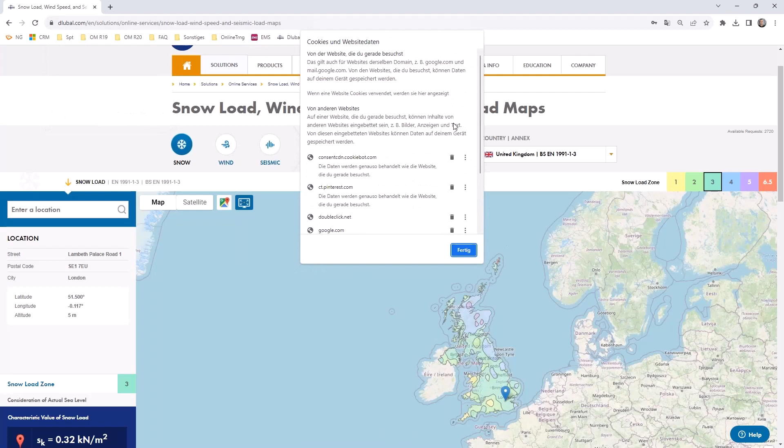So this is of course some data which is saved on the computer to quickly access a page, but it might be necessary to reload it. And then you can select if you want to allow all cookies again. And then the frame should load again for you if it did not do before. So let me quickly sign in so that I will have enough requests for today.

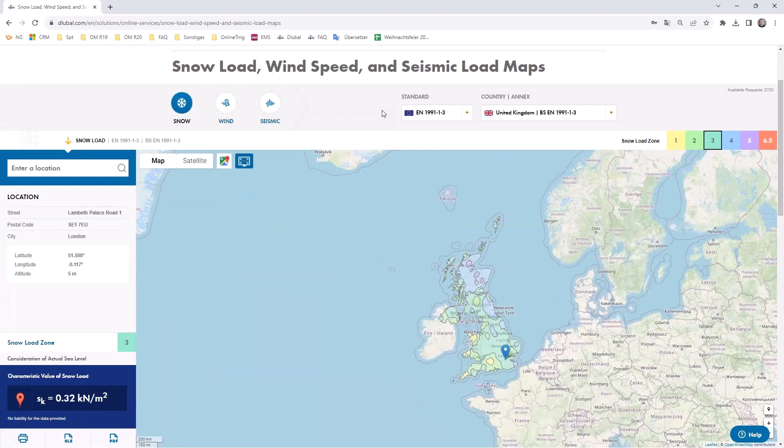And let's go again to the snow load map. So I think you're already coming to it. So it is not available yet for every map. So I do not think that it is available for Great Britain. Oh, it is already. In my tests, it was not available. Okay, so we can use, for example, Great Britain with the Eurocode 1991-1-4.

And then you see the small button on the left bottom of the page, which is of course still announced as being a beta. So please double check the values if they are correct or not. You can of course do that in RFEM, or at least be suspicious if they might be correct. It's still in a beta mode, but we do not want to not present it. So you can think about using them.

So if you once click on the button, you can already see the three diagrams you can now gain. So it's not only about the basic wind speed. No, you directly jump into the map and parameters according to the Eurocode, and it will create the diagram over a certain structure height. So if you would adjust it to over 20 meters in here, you would see that the diagram will of course be adjusted. And you can of course as well jump into the wind profile tab in order to copy paste the values with the level.

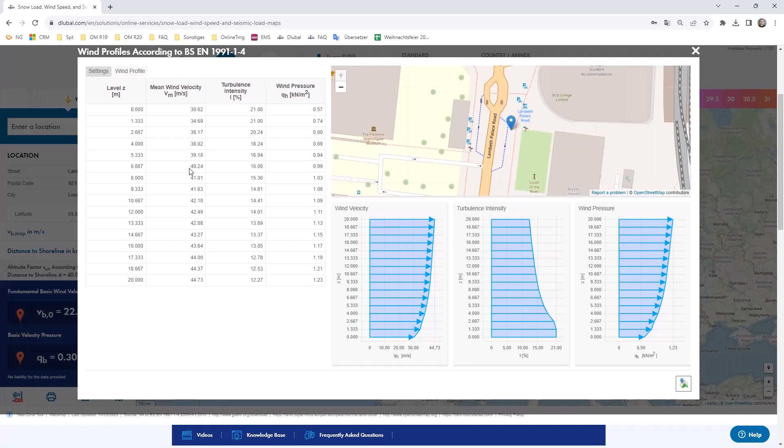What is then of course necessary if you jump into the RWIND main program for the definition of the wind profile and turbulence intensity profile. You can as well also choose that you want to have a user-defined definition and adjust all the values you see in here. You also get a closer look on the place where you are. You can also switch off the map if you rather want only a big display of the diagrams.

So just once to remind you again, it's still in a beta phase, so it might not be available for every standard we provide, but this might be quite useful for you if you use RWIND without RFEM 6, or if you want to compare your hand calculations, or if you want to compare our calculations and tell us something might be wrong or not.

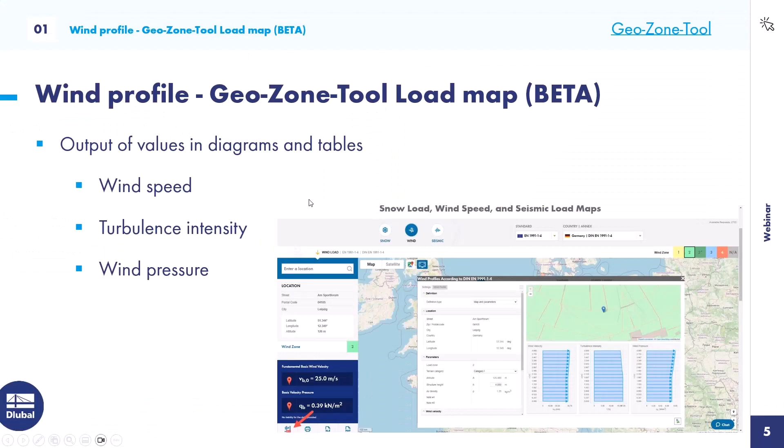So this was something not directly linked to RWIND. So let's now jump into the main part, of course, our program RWIND. And this is my summary of the 4 features I would like to mention. Maybe you are not yet used to it, but you can also find all the data in our extranet. So if you log in with your account and you go into the development tab on this page, you can see features and also bugs. And this is most likely the place where you can inform yourself of what is new or what was fixed.

And if you then restrict it to RWIND, this is in German, depending on the language which is set in your account. You can see that these features were introduced into the 4th version or the 3rd version and so on. And you could also check the bugs which were fixed for the certain files.

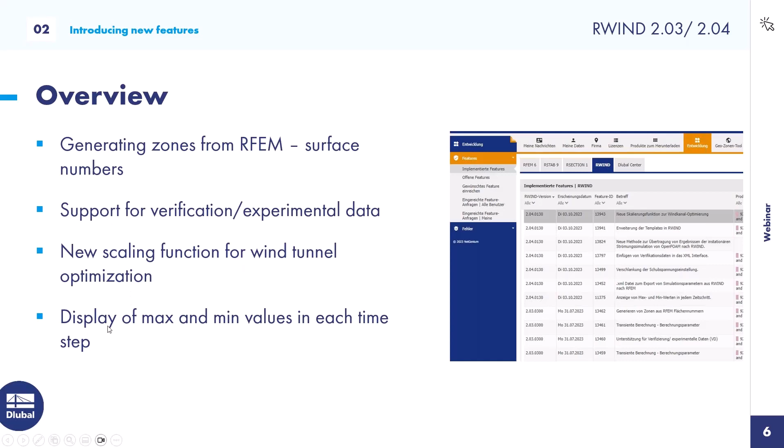So what I would like to talk about now is the first feature, the generation of zones from RFEM surface numbers. The next one will be the support for verification or experimental data. This will be the main part of today's webinar. The next one is a new scaling function for the wind tunnel optimization. And last but not least, we will quickly step into the display of maximum and minimum values in each time step. I have, of course, one slide for each feature, and then we jump into a small file in order to check where you can find it.

So you are now able to generate zones directly from RFEM surface numbers. Of course, only if you use RFEM 6 and then hand over the model to RWIND. We will now also hand over the surface numbering, and then you are able in the edit part of RWIND to generate zones from surface numbers. So each surface, and you can of course split as much as you want in the RFEM main model, will create a zone.

And remaining objects, so you may of course also hand over members, they will also have triangles. They will be assigned to zone 1. So of course that's a bit of a complication that they are assigned to zone 1.

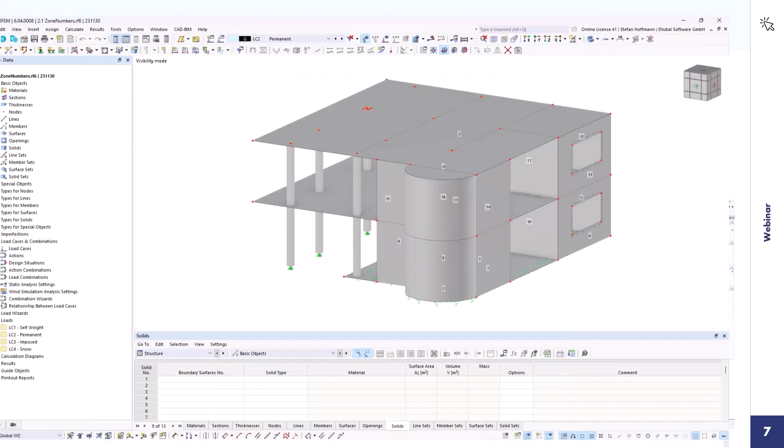But if we now step into my example file, what is also installed, it's the concrete building where I switched on the surface numbers. You can see that we have a surface number 1. And if you do not want that 1 also includes the member triangles, you just have to once go into the table and insert a row. So the surfaces will not start with 1, and all other things should be synchronized in the back.

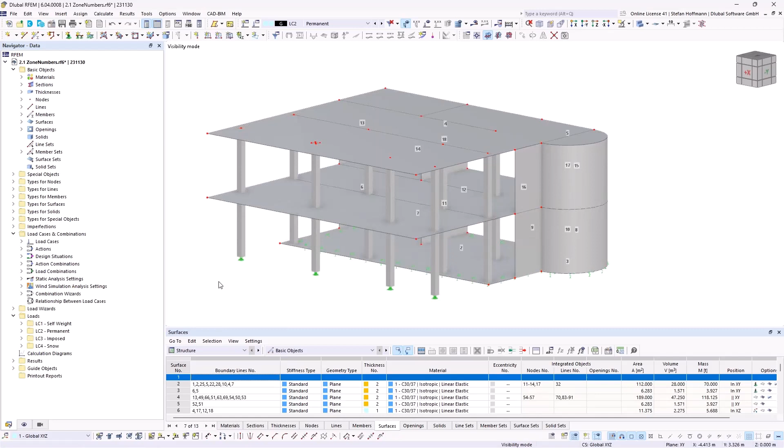And now we have only surface numbers starting by 2, and all other stuff may be handed over to zone 1. If this is not fine enough for your difference, we will also see it in the main example later on. You might also right-click and divide surfaces with intersecting lines in order to create multiple or more zones.

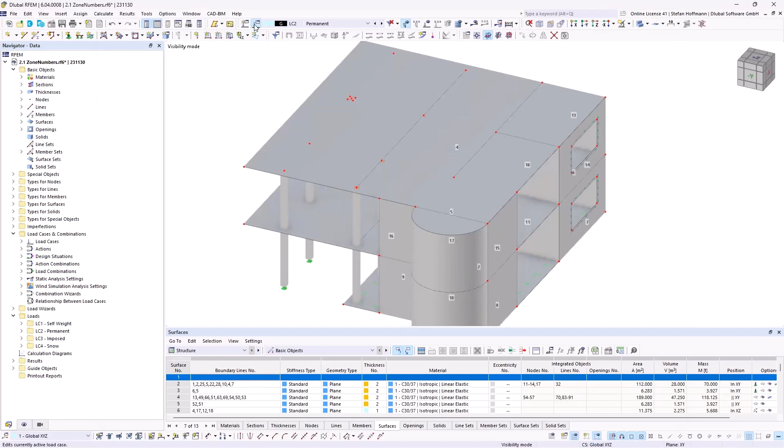So let's quickly create an example wind simulation load case. We will not care about any settings that are necessary to be taken. We will just open our model in RWIND, which can be quickly done by the button I used. So our geometry is handed over, and now there would be only one default zone. So it is possible for you now to hit Edit, Zones, and generate zones from surface numbers.

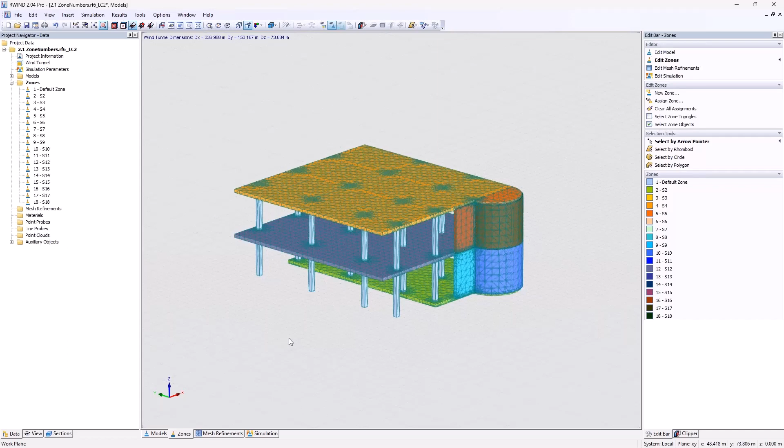So you quickly see that there are now a lot of zones created, and you do not have to do that manually. So you don't have to create a new zone and use the selection tools to gather all the triangles which might be necessary for your file. No, if you already consider the surface numbers or a certain division in RFEM 6, you can directly create these zones in order to quickly evaluate maybe normalized pressure over a certain zone.

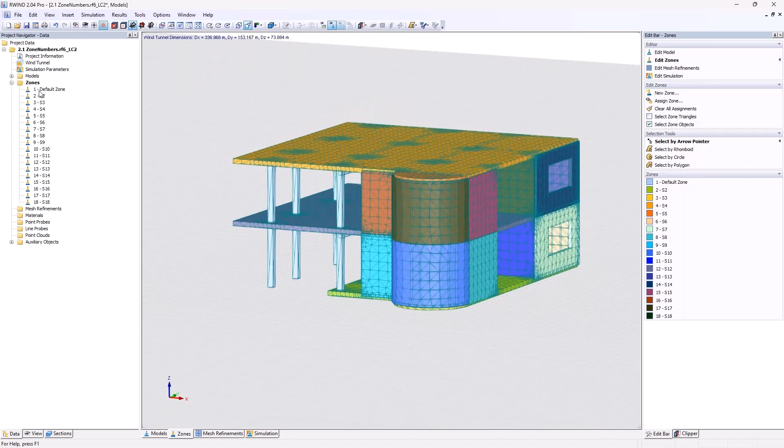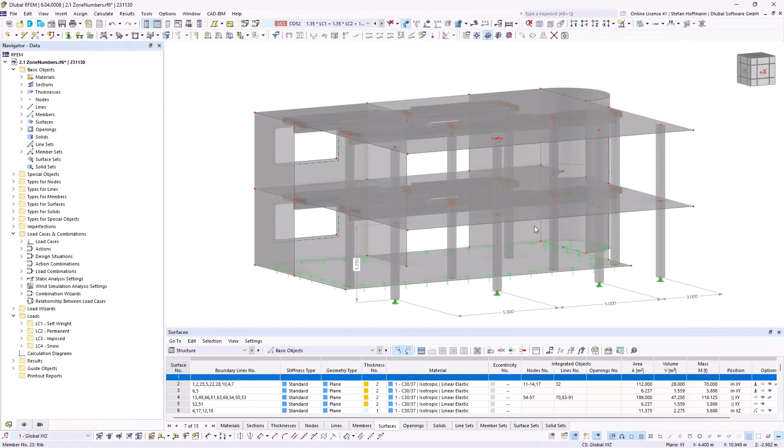I will later on show you how we will use it on our monopitch roof. And as told, you can see that there's of course also the default zone number 1, where you will then be able to find every other stuff which is not related to a surface number. Okay, so this was the first feature I wanted to talk about. We will use it later on in the next example. So let's close everything, go back to my presentation.

So the next one is the support for verification and experimental data. So we now offer you the possibility to enter verification data into the table. This is yet linked to point probes and pressure values that you can enter. And you can then display the data in graphs using labels, so the normal point probe labels. But you can also do a graphical representation of the differences between the verification data and the simulation results. You can switch that in the result navigator.

You can also choose the extrapolation of the data on the surfaces in RWIND using 2 methods, which are yet introduced. They are explained in the manual. And you can also restrict the verification data to be extrapolated to a certain zone. And we will later on use that, of course, in my main model.

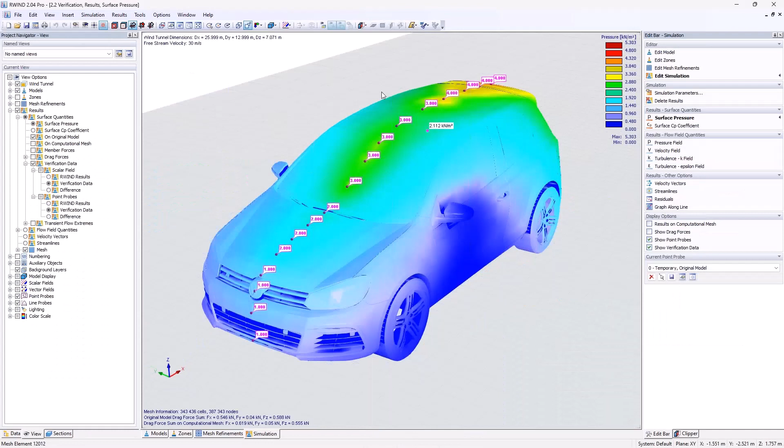But in order to introduce the verification data first, I use the Volkswagen Golf, which is an example installed already if you install RWIND. And then I have already defined a point probe. I activated the option for the point probe. It might be, of course, a bunch of probes you want to enter if you want to define certain values for zones.

We now only did 1 point probe, and if you activate the verification data, you will get one more table over here where I have entered random values. So they do not come from any tests. I just wanted to show you the labels so that you can quickly estimate where they are and what they are doing. So then you will also be able to adjust the verification data options.

So you can choose the interpolation method, which is yet fixed to all point probes. So you cannot yet differ between Gaussian interpolation or diffusion, but you may set a different data range constraint for certain zones. We will see that later on in the other example. So if you do not know about Gaussian interpolation or diffusion, you can just hit F1 on the keyboard. And usually it should be linked, but maybe we did not yet do this.

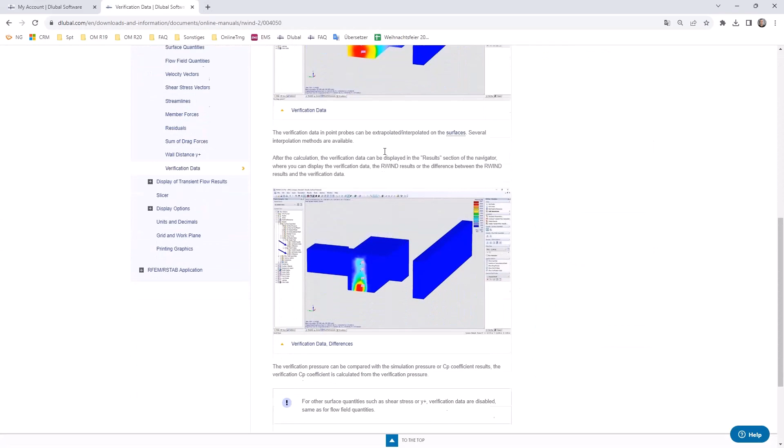So you can quickly, of course, search for verification, wait some seconds, do not wonder if you do not need to hit enter, and then choose the topic, which may be about verification data. So there is some general part of it.

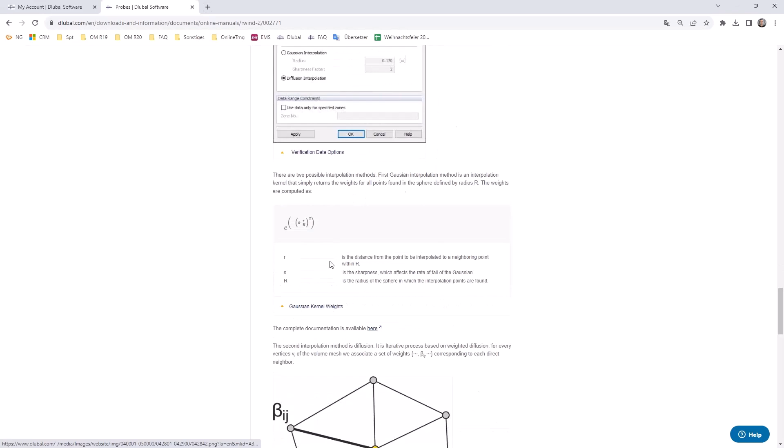And if you go into the probes, we quickly search it, then you can see the explanation about both interpolation methods. So just scroll down and then you will find the information about the second interpolation method, or I think also about the other ones. Yeah, so we will not dive into the theory behind it now. You can double check it if you are interested later on.

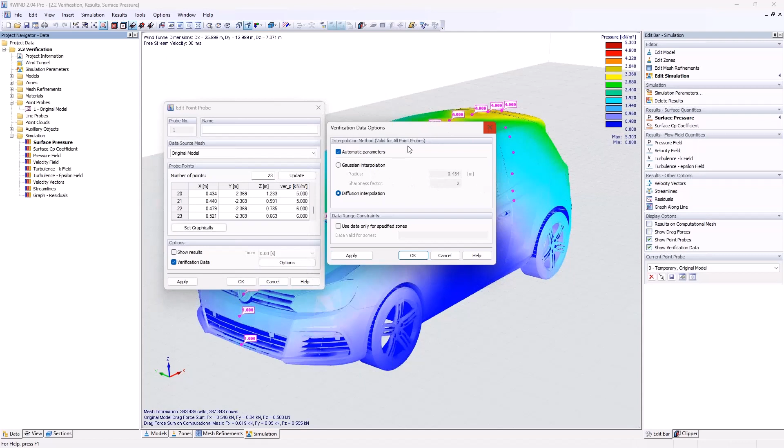What I do remember by myself is that this will most likely diffuse interpolate about a whole area in slides. And with the Gaussian, you can set a radius which will interpolate, but we will once again, of course, later on show that.

And if you have these results, you can always differ between the verification data of the scalar fields and the point probes. So you can step on over and show the results you get from the numerical wind tunnel analysis. And then you can, of course, also switch to the verification data. And I think the biggest influence will be the difference. So you can directly check according to the colors how far our calculation is maybe away from the standard, which does not really mean that it must be far away from the reality.

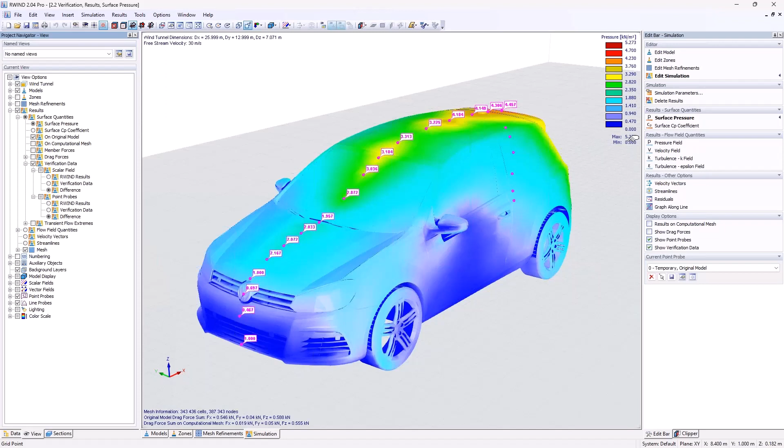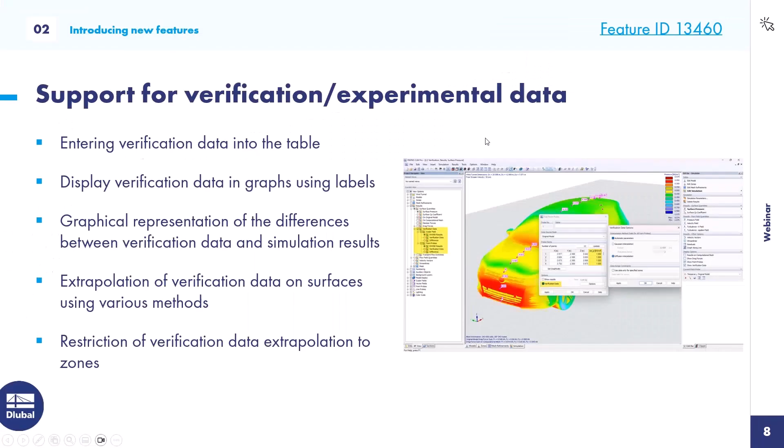So there's, of course, always the question, how can we verify our model? So from my proposal, every FEA analysis or also CFD analysis needs to be, of course, verified by a wind tunnel experiment. And then you can enter the data and check if the assumptions you make in this complex CFD analysis match the reality. All right, so we will later on use that feature, of course, once again.

So the next part is the new scaling function for the wind tunnel optimization. So you are now able to define scaling factors to automatically adjust the dimensions of the tunnel, and you will be able to save the user-defined scaling factors. So let's quickly jump into the example, which is once again the Volkswagen Golf car. And then you usually double click on the wind tunnel. So let's zoom out a bit maybe, and see these automatically adjusted values.

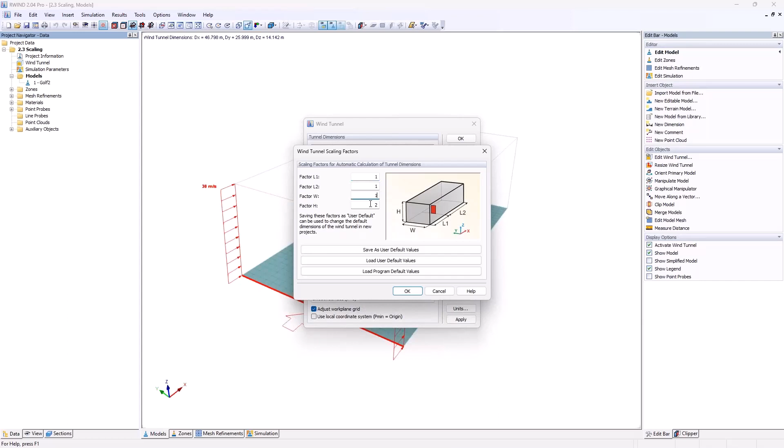And then there is a button of the scaling factors where you can now define your own values. Usually it is like this. So it is multiplied then with the normal values you have in the program. So this is the wind tunnel the program will offer you. But we propose most likely, if it's going into a more detailed calculation, a recommended wind tunnel size.

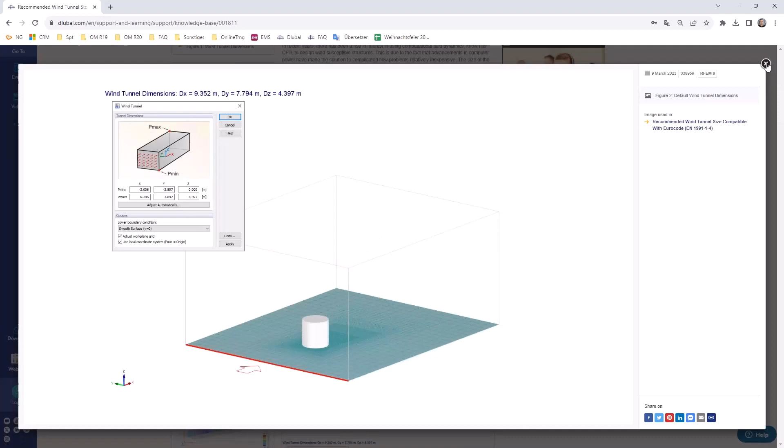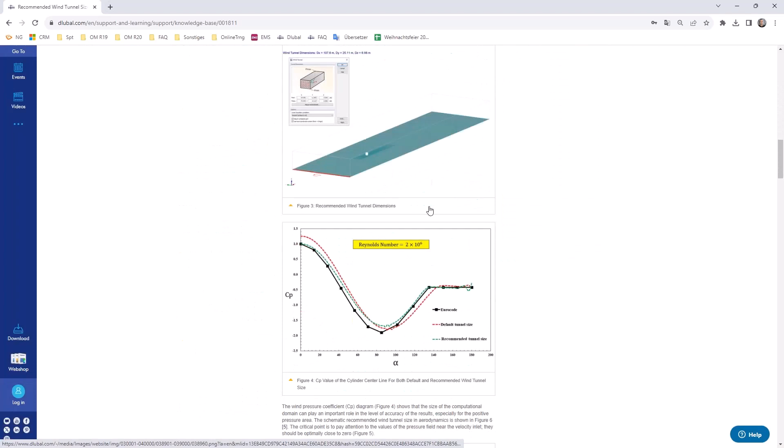I did already once mention this technical article by Mr. Katsemian in a different webinar, but I would like to once again put some effort into it, that it is quite necessary to think about the dimensions. So if you compare the standard dimensions to have a quick estimate of the wind load pressure and the size we would recommend, which is of course then extending the calculation time a lot, if you want to compare values to the Eurocode, you can see that the size will be much bigger. And I did, of course, a quick estimation of what the values should then look like.

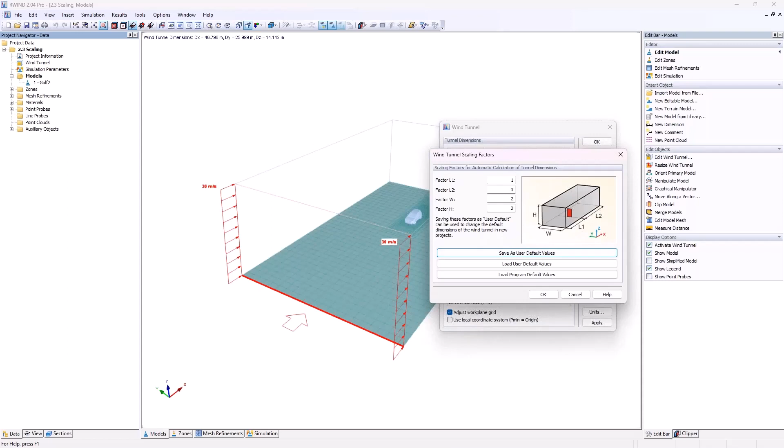So if you would like to match the technical article, I do not like numbers with comma, so it would be 2.7 in this length, 1.6 in this direction, and 1.85 in this direction. I would use 1, 3, 2, and 2, hit OK.

Then you will be informed that these are just the factors used, and you have to use, of course, the adjust automatically button once. If you then hit OK, you can see, well, it did not change a lot because I think it was already bigger in front. But then your wind tunnel will be adjusted according to the factors you enter in here.

So if you put 10 inside it, say OK, and adjust it, then you can see that this factor is going to be increased a lot. And then this will offer you the possibility to not think a lot about meter values, but to quickly enter the factors you would like to use, save them, load them, and apply them on your model.

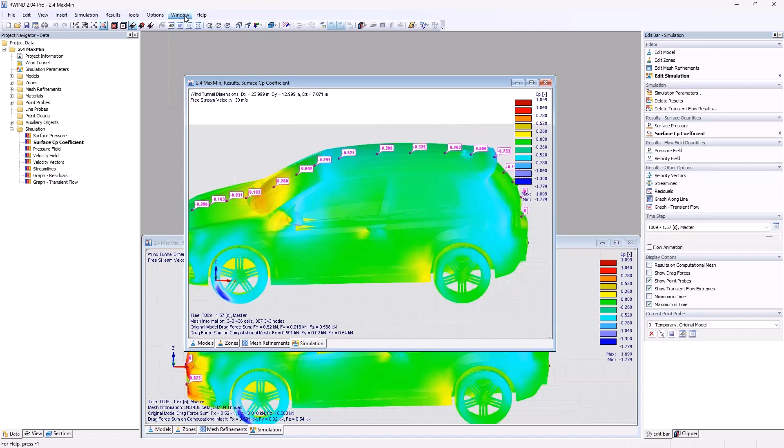So the last feature I would like to present today is the display of the maximum and minimum values in each time step. So this means it is for the transient calculation, limited to our RWIND 2 Pro version. And it will offer you to have some kind of envelope for surface pressure or Cp coefficient values. So let's jump once again to the golf car. There's also a transient calculation file for the golf car.

So what it is about now is that usually if you do not show the transient flow results, you will have a slider over the time where we can see, most likely on the back part of the car, that the pressure will of course change over time due to the wind acting, of course, turbulent. And then it would be kind of hard to evaluate where will be the maximum suction or the maximum pressure.

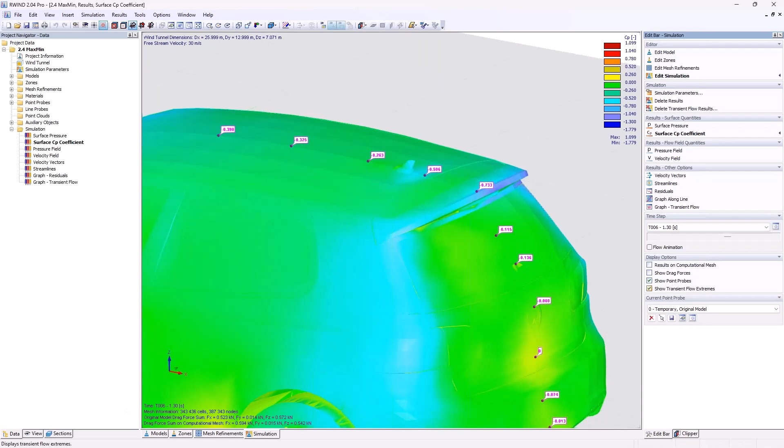Or if you are lazy and you don't want to check that, you will now be offered to show the transient flow extremes. And if we, of course, use 2 monitors, we can once show the minimum in time, which might be minus 0.814. So it's of course the minimum with a minus. And we can then also choose to show the maximum in time. So this same point probe would be, in a transient calculation over time, gaining the values of minus 0.733 or minus 0.814.

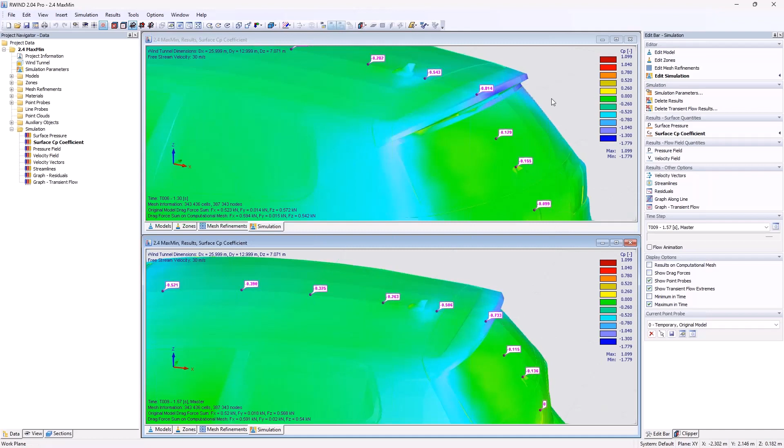So this is one way to determine the maximum or minimum values for your structure or your file. You can, of course, also switch that value in the view navigator, but I think the quickest way is, of course, to do it on the right. Okay, so this was kind of a slide presentation, but was also stepping into the program.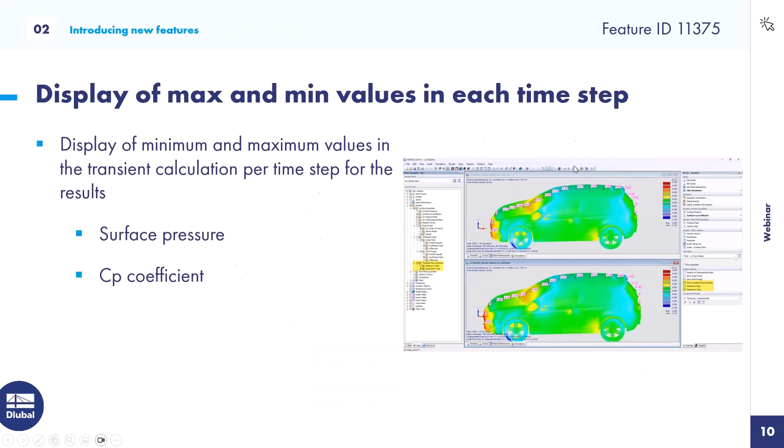And now I would like, of course, to show you how we can use the feature of the verification data on an example. So it's a building, it's 10 meters long, 8 meters wide, 4 meters high, and it has an angle of the roof of about 5 degrees. So it's a monopitch roof, and we will apply the zones for monopitch roof. If the wind is going into the main X direction, there will be 3 zones. So the F zone, G zone, and H zone according to the Eurocode. And it will be divided into these parts.

So we will use, of course, the generate zone function in our model. And we should get these zone dimensions. So I have stolen them from the wind load assistant because this is a known example type of roof for the Eurocode. And it is supposed to have these pressures on the certain zones. So we will start with a fresh model in RFEM 6. So let's give it a name. So it's the name of today, and it's called monopitch.

And what we of course need to activate: we will not do any design of elements. So it's just really about giving our model into the wind simulation analysis and gaining the pressures of it. So I will only activate wind simulation. I could activate all because I'm working for Dlubal, so I'm not limited to any add-on, thanks to that. And we will do it according to the German national annex, because we are quite used to do so, and we also tend to present our English webinar for the German annex.

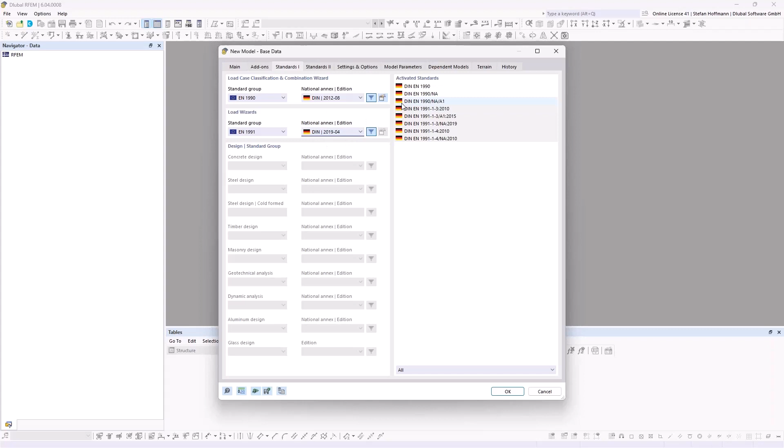What you can now as well do is choose already a location in the GeoZone tool if you want to. We will do that later on. And you could as well also define a terrain. Just remember, it is possible, but since we would not like to have any influence by neighborhood or by the terrain, we just skip that. So once the file is loaded with all the data used before, remember that the first angle of wind simulation load is going into the global X direction.

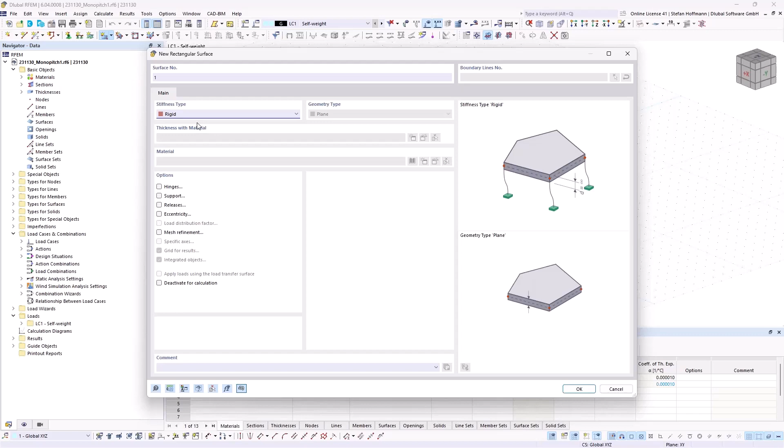So I tend to rotate my model because I dislike to rotate the wind load. And I will now start by modeling the bottom plate. So I will simply use the rigid type, because I'm only interested in my wind load on the structure. I'm not interested in any design yet for the building. So it does not matter if it's concrete or metal. We can just use rigid because I do not account for any stiffness.

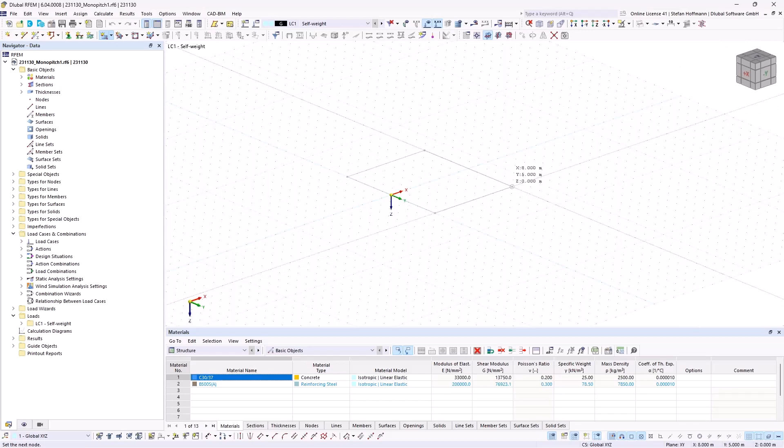So now I told that it is 10 meters times 8 meters. So we would now, of course, need to define this size in our program. So where did I choose it? So I'm starting at minus 5, and we're going to 5 and 8. So this will be the bottom plate.

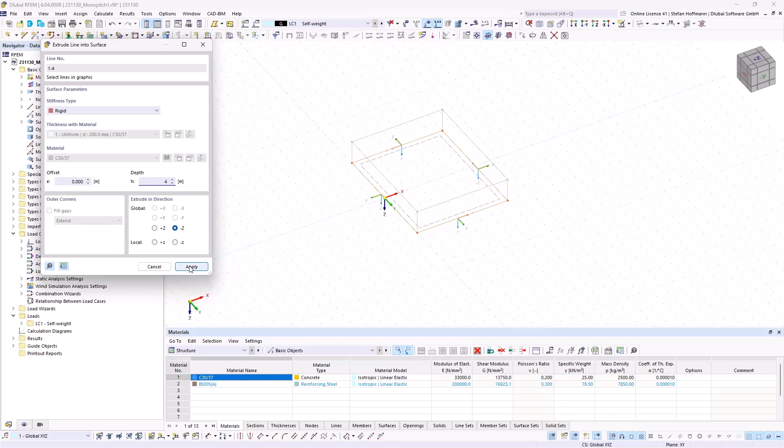Then we can simply, with the control key on the keyboard, mark all the lines, hit a right click on them and extrude them into surfaces. This will offer you the possibility to quickly model a surface. We will once again use the rigid type, and the height should be 4 meters into minus z. Okay, we apply that. So we most likely have already our hull.

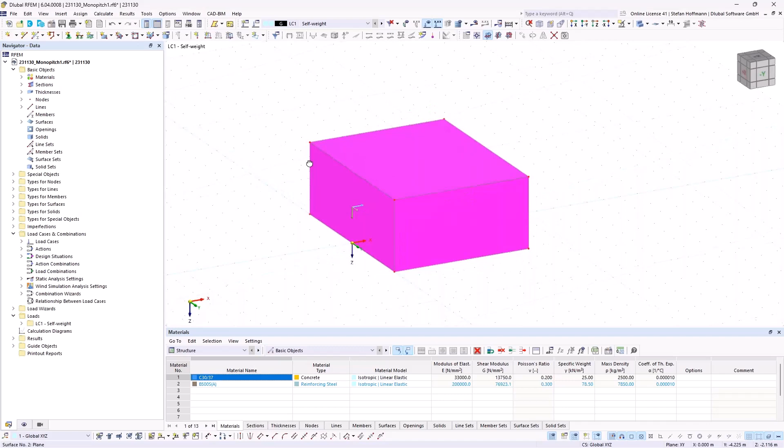You can of course switch into this display if you like it even more. And then I would just mark my bottom surface and copy paste it with the control keyboard and snap it to the top. We of course need some boundary conditions at least. So I would just apply some line supports, being some singular foundation on the length. And then it's of course about to define the angle.

You can quickly do that by simply hitting the surface and use the manipulation tool to chamfer it. So you can now decide that you want to chamfer it, for example, 5 degrees. Due to our wind load assistant, I use a 5.01. And then we need, of course, to think about what will be the direction. So it is about our y-axis. So this is the turning point, and it should be into the z direction. So we want to have it into the global z direction.

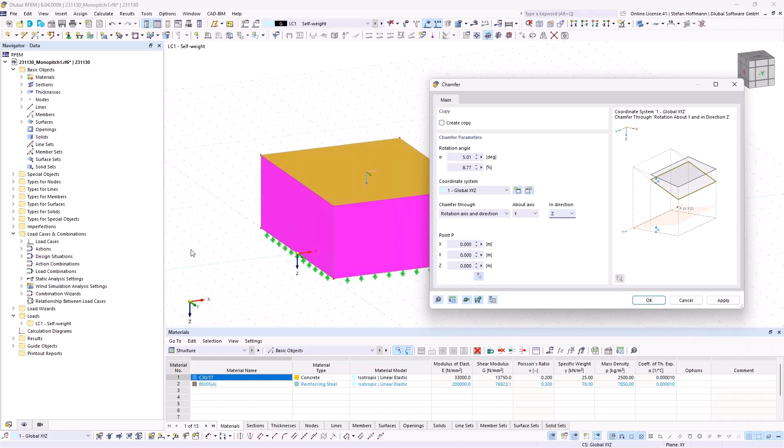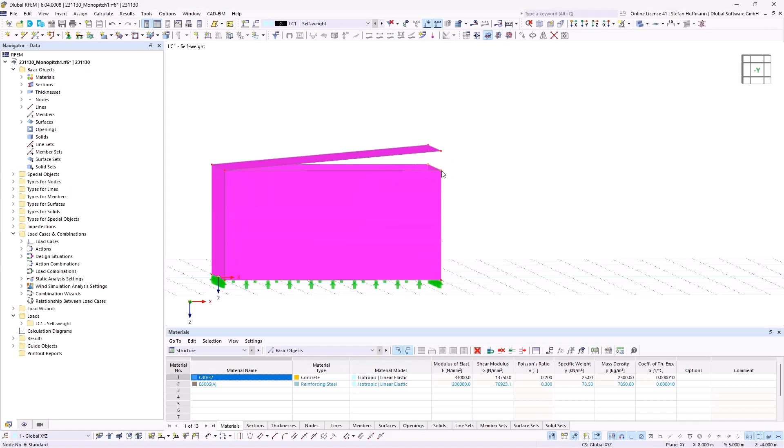Since we use this point already, you don't need to choose it, but we can of course once choose a node in here. And if we hit OK, it is moved. Since I only selected the surface, all other combined elements are not moved. So we could simply before mark everything, or we now just mark both nodes and drag and drop them to this position. And then you can see that the surfaces are quickly adjusted. So it's quite smart. If you would like to model, it's close to a CAD design, I think, that you can use, of course, drag and drop and so on.

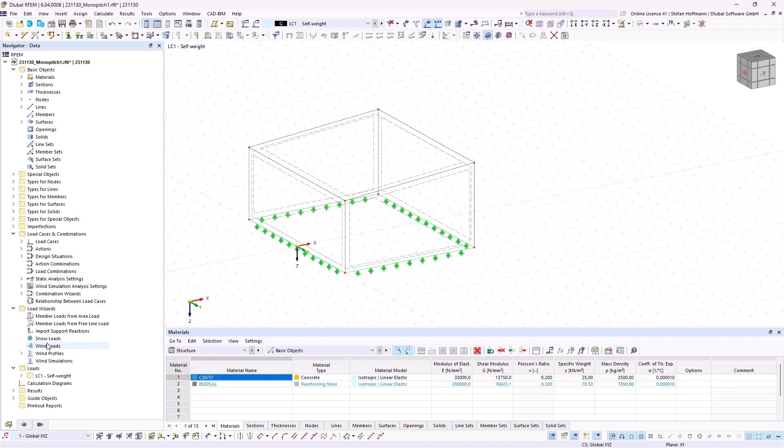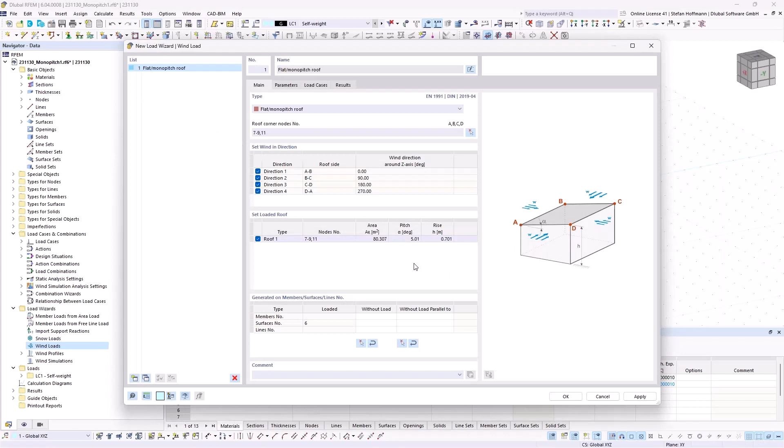So the next thing we would like to do is, of course, to check the wind load areas. We can do that with the wind load wizard. This is not RWIND. This would be the standard approach. And we are now only interested in the mono pitch roof. And then you see the picture, what 4 corner nodes you need to choose. So we simply pick our 4 corner nodes and hit OK. And then we introduce the parameters.

So now I hit the button to jump into the GeoZone tool, and I will use the location of Leipzig. It does not matter where we are. You can see that the German standard will choose the wind zone 2. I will load all the data. It will gather all information from the GeoZone tool, so you do not need to enter them manually. And then I can adjust the structure height, which is roughly 4.7 meters, and we will use the terrain category 2. If we do that and create all the wind load cases, we can quickly estimate the results already.

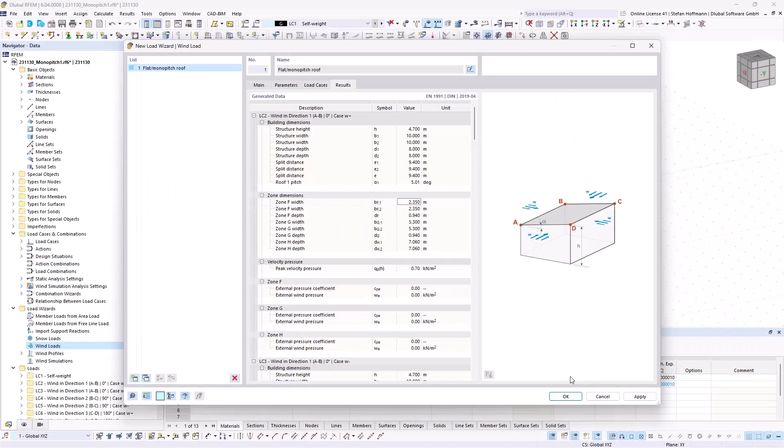So you see the load directions and you see that our zones will be split. So if we jump quickly back into this part, we will be given all the data, what the standard will give us. So the width of the zone F, so e divided by 4 is 2.35 meters, and e divided by 10 is 94 centimeters. So you will be given this information. This is why we do it as well shortly with the load assistant. And if you display it, you can see that this is the load or the suction we are going to experience in our wind, and we will then check it.

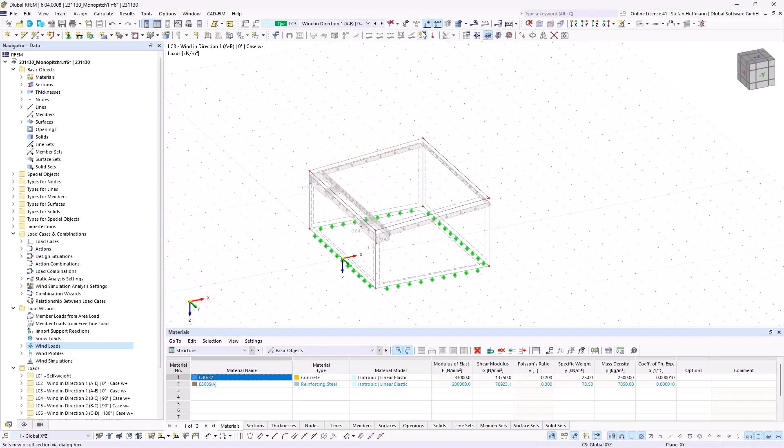So let's continue. So what we now want to do is that we already define now zones. So we would like to split the roof into parts. For that, we would like to have our lines showing into the same direction. So now we can use both lines, hit the right mouse button and divide the line via distance. So now we could just simply enter 94 centimeters, but it is meant as a projection showing from top.

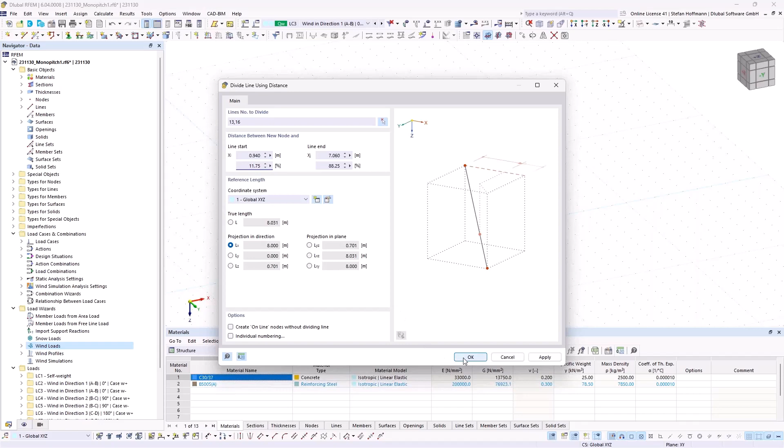So you are now able, of course, also to use the projection of the line into the local X direction. You can enter 94 centimeters in here. And if you do that and hit OK, you can quickly divide the line using it for further modeling. We will now simply draw a line into here and have now the line which is going through, and then I told that the distance will be 2.35 meters.

So we will use this line and also divide it with a distance. It's not about the projection or anything since it is the same if we use it, and split the line at 2.35 meters. We will also divide the line at the distance at the end, 2.35 meters. Okay, so once we have it, we can mark this node and copy it from this point to this point in order to have it.

Or you can, of course, also try to hit the tool in order to snap the perpendicular part. I'm not sure if I activated it. So I just simply use, for example, also this line and copy paste it over here.

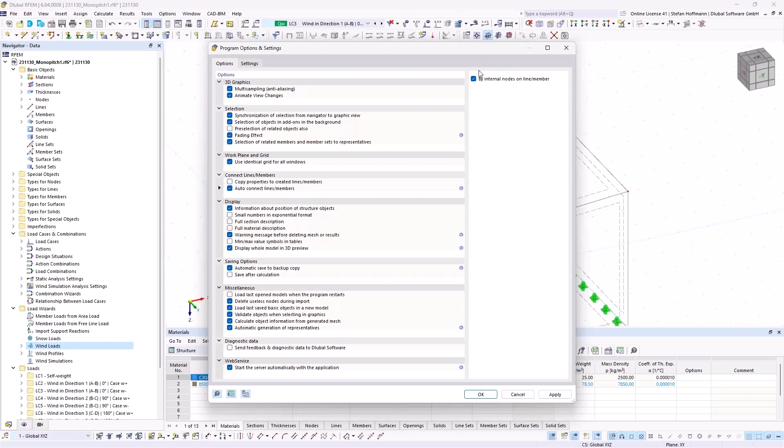If you are curious why maybe there are red nodes or blue nodes created, so if the line divides or not, you can step into the program options and choose the setting for what it is supposed to connect, members or lines. If you do not manage to do so, you can simply later on use this function, go over and check if the lines will be divided.

So the last part we would need to do in order to have certain surfaces is to right-click on the roof and divide the surface with intersecting lines. And voila, we have now 4 surfaces for the top, which will be giving our 4 zones as expected, and what we would like to do so in order to compare it with our experimental data.

So this is one possible way. If you have a quicker one, of course, you can also use your own way of modeling.

Next part we would need to do is for the wind analysis, to step into the mesh settings in order to check what wind simulation options we would like to use. So you can think about the level of detail or the simplification of the model. You can think about only visible objects that they should be handed over.

Since we do not have members, we can just deactivate this option. We will also not hand over any terrain. We will also not hand over any surrounding models. Let me shortly drink something.

And we will also not keep the wind simulation results. Since we use rigid surfaces, we do not need to think about surface thickness. Run Rwind in silent mode is mainly supposed if you have a lot of load cases and you do not want to double check them and manually start the calculation in Rwind.

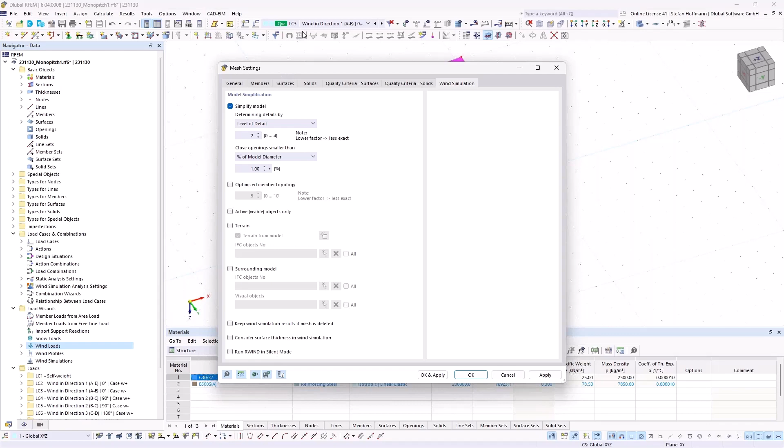You can disable this button, and once you calculate a wind load case, Rwind will open and you will be given the option to adjust everything you would like to do. So if you want to double check the model, you can then start the wind calculation by your own.

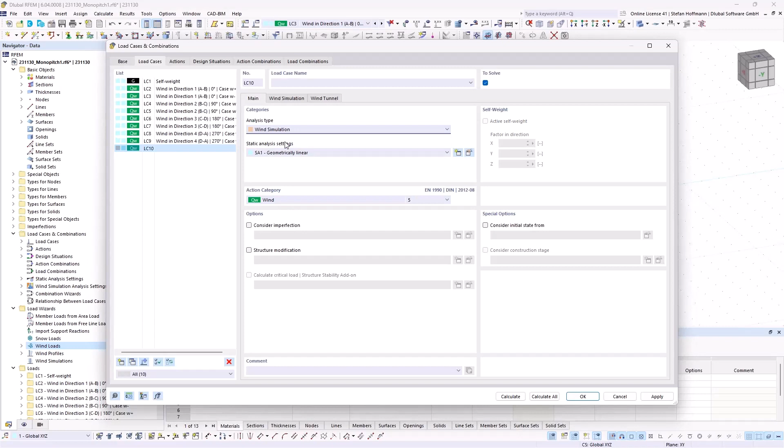The next part is that we need a new load case, of course. So it will be the action category wind. It has to be the analysis type wind simulation. And then two registers will open on the top. There you can choose for the wind simulation, of course, further settings.

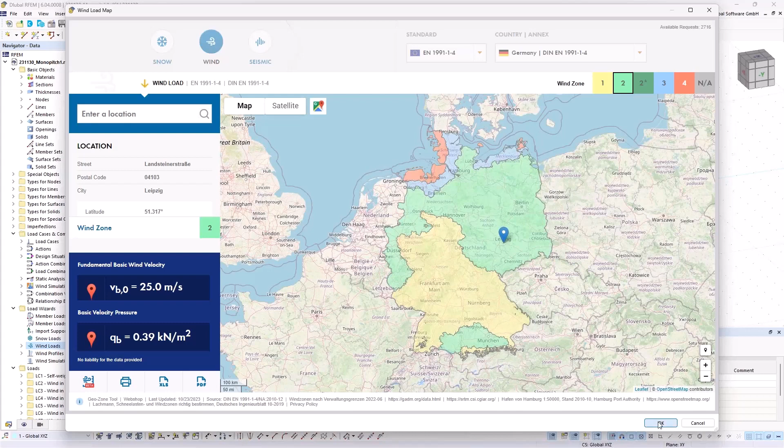So the first one would be the wind profile. If we step into it, you can see that this is, of course, once related again to a certain destination. So we once again check Leipzig in order to load the data inside it. You can also manually define it if you want to.

We would just change to the category 2. The height is taken automatically by the program. We will not adjust any other factor inside this. And there you can already see the profile, which should match with the ones I showed in the beta phase. But due to the beta phase, there might be still some adjustments.

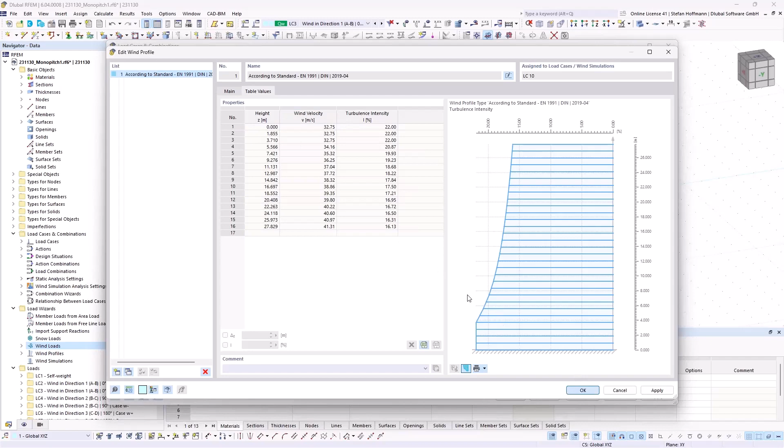Using this button, you can switch between the turbulence and the wind profile, or you could also be able to see the wind velocity given in the tables. If we defined it, the last part would be to double check the wind simulation analysis settings.

So if you would like to do a basic steady flow calculation or a pro transient flow calculation, this is always up to the structure and turbulence you are expecting. We will simply do a steady flow calculation. We will use the presets given over here.

And if it is up to some certain controlling of standards, we would propose to also activate the boundary layers. But for this, please check out our technical articles, because Mr.

Katsemian did provide a lot of verification examples and also a lot of nice to know facts for maybe beginners in a CFD analysis, because we offer a tool with a quick estimation of results. There are still technical parts behind it you may be curious to know about. There are other things you could adjust, but we will just leave it as is.

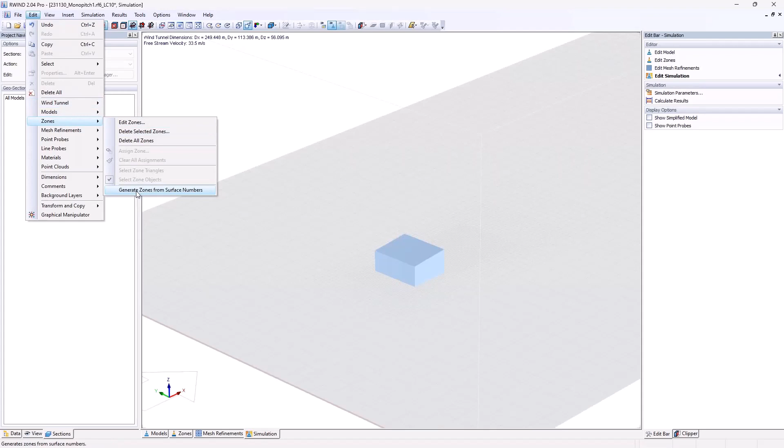So if we would now hit OK and start the calculation of LC10, you will see that it will now hand over our model to Rwind. It will start Rwind, and we would now be able to do the stuff we would like to do. So currently it would be necessary to manually generate zones from surface numbers that you can later use. We are planning that there should be an automatic option, because usually you would like to automatically create zones.

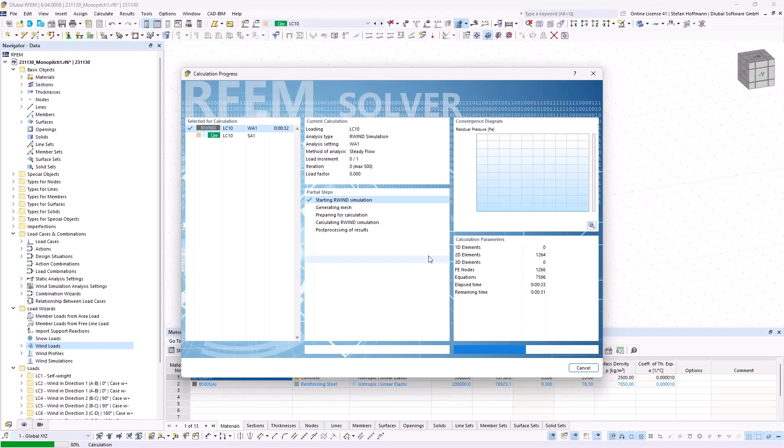If everything is done, we could now start the calculation, but since this will take 5 to 10 minutes even for this file, I will not do it here. I will open my already calculated file. Of course, RFEM will give me some error, but I did already run the file for you.

So let's make a jump in time. 10 minutes passed, and we now have our results on the model. Let me quickly delete the line probe I already defined here. So we have already our zones defined. I always have to double check: Zone 7 is the big part H, 8 and 9 is F, and 10 is G. I hope I will remember it; if not, I'll have to double check again.

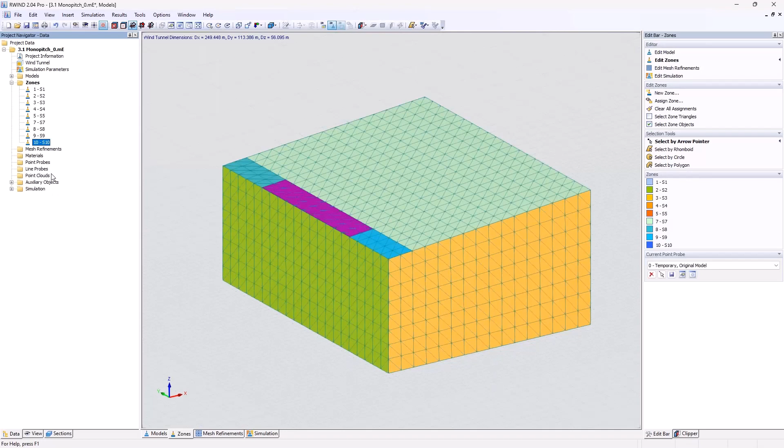So what we are given now after the calculation is, of course, the pressure for our front, our roof, sides, and so on, with certain values. Now if you would like to compare that to different standards or your own analysis, we will define a new probe. I will name it F, for the zone F, so this will be these small parts in our model.

We will define it on the original model. If you are curious about what the model meshes are about, there is a big chapter in our online manual, because this is one main part of Rwind: we give maybe a non-topologically correct model into Rwind, and Rwind will create a fine mesh for the CFD analysis and transfer back the forces onto the model.

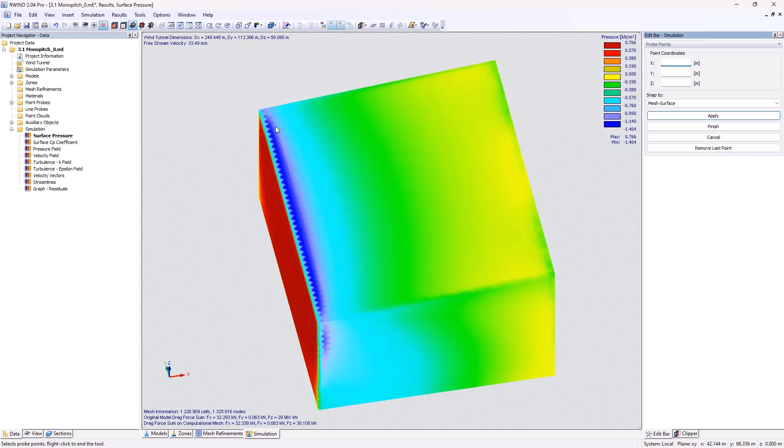So let's start by setting point probes graphically. We are now only interested in the roof, so for part F I will use 2 probes over here. You will see them soon. I hit finish, and then I will quickly switch to the Rwind results, since it was still set to show the verification data. Then we can see that we have those 2 point probes giving results at this point for our zone.

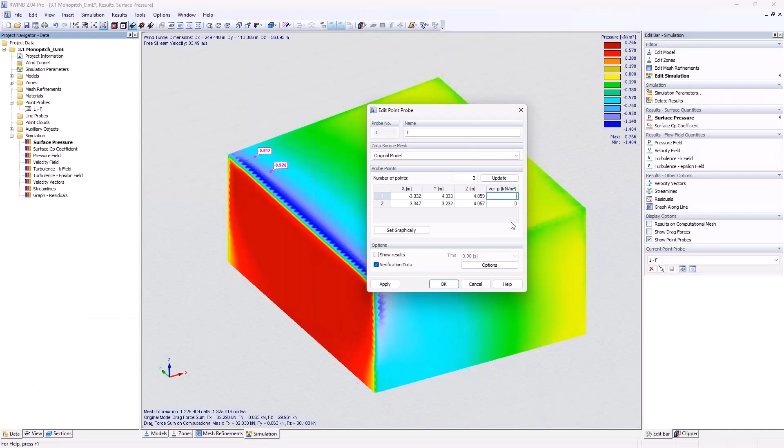And if we now would like to introduce verification data, we just apply this button and we will check what the standard is thinking of. So it's minus 1.19 kilonewton per square meter. Let's enter minus 1.19.

And quickly check that this will only be used now for zone number 8, and let's use the diffusion interpolation. Say OK, and let's quickly switch the data to the verification data, because I think this is a smart way to see what the logic is doing behind these probes. We inserted 2 probes for the zone and restricted it to be interpolated only in this area. So what it tries to do is keep the minus 1.19, and toward the boundaries, the other surfaces, it tries to interpolate.

We will now introduce some more points. I will just enter 1 more in the other area, say OK. We go in there, it already has the latest value. And if we would switch now to the Gaussian interpolation with a radius of 0.72, hit apply. Let's put this window in here. We will see that nothing is done here, keep in mind we restricted it currently to 8.

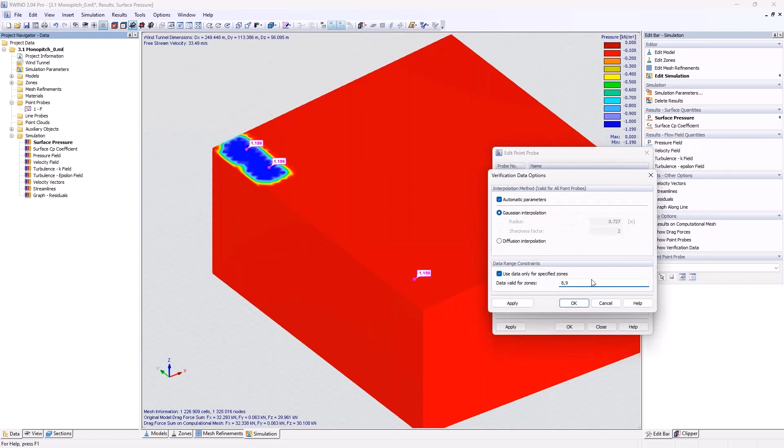We can also restrict it to 8 and 9, and then we see that the interpolation is done in a bit different way compared to diffusion. So with diffusion, it is using a wider area, and Gaussian is using the automatic parameter defined here.

So it's a radius around the dot of 73 centimeters. We could also uncheck the button and increase or decrease the area, depending on how many probes you would like to set.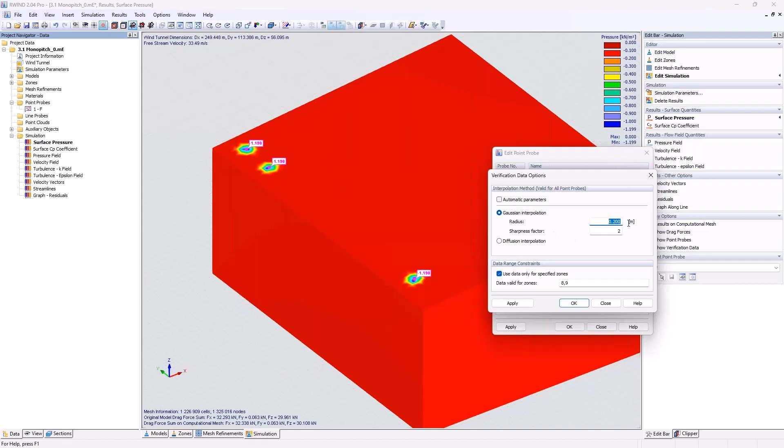In a normal wind tunnel analysis, in reality, you have a certain amount of probes over the height. Since this would extend my webinar to more hours to introduce such an amount of probes, we will only use 1 probe this time, and we will increase the radius, for example, to 3 meters, because this way most of the zone will be covered by my defined verification data, and all the other stuff will then be interpolated. So we will set a new probe for the next area.

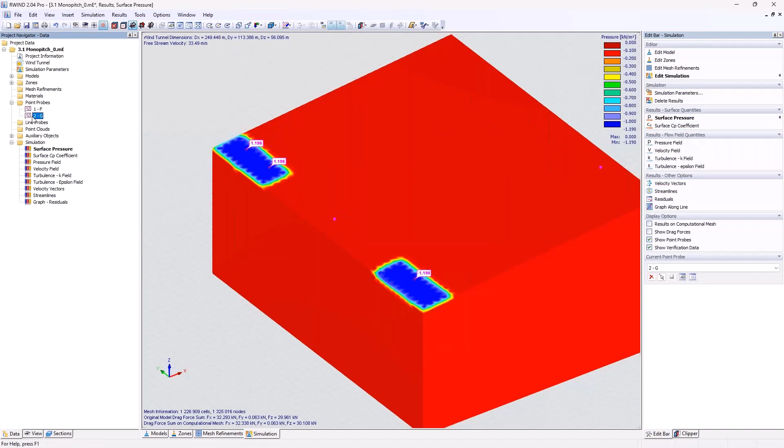So this would be G. We will set it graphically. We will once again only use 1 dot. It will be more usually, but I set 2 by mistake, so let's only keep the first one we used. You can also later on adjust the values if you need to do so.

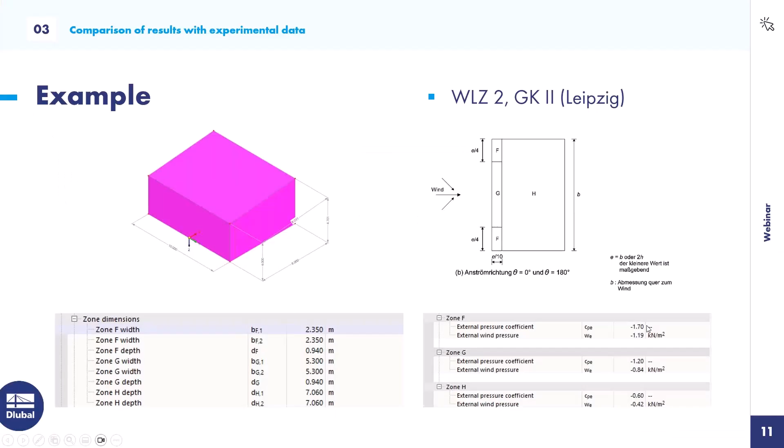And we will now once again define the verification data for this part. So let's jump back, should be minus 0.84 according to the standard. So let's enter it. As you can see, this part on top is limited for all probes, and we will define this probe only for part number 10. You can see that it will also interpolate between the zones a bit better than before. So now we have already defined 2 parts.

So let's enter our last probe, which would be about the H area. Once again, I only set 1 probe over there. We define the verification data, which is supposed to be minus 0.42, sorry, and we assign it only for zone number 7.

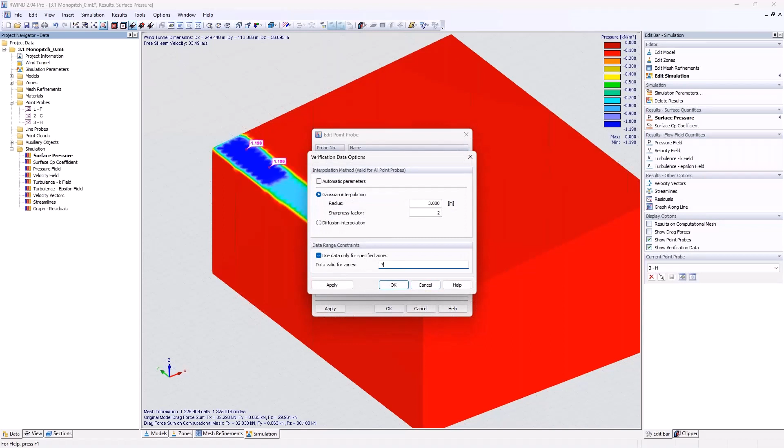If we hit apply, we can see that our radius is, of course, too low since the zone is about 7 meters and 10 meters, but it does not matter. We can increase the factor in over here, for example, to 6, for our example, to extrapolate our value to the whole zone.

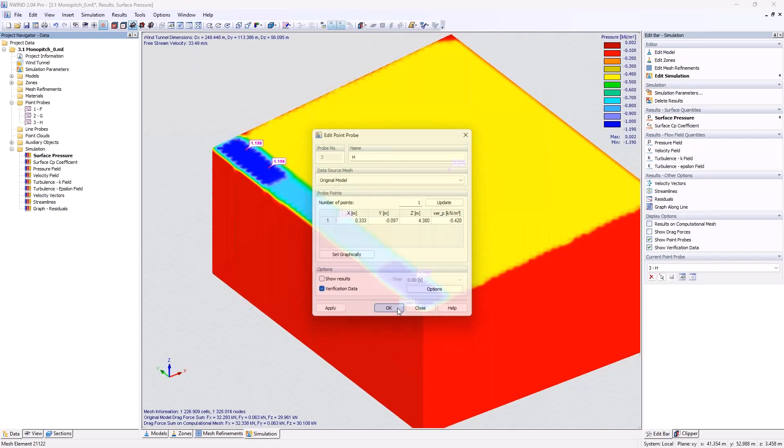So if we did that, we now have a smart graphical representation according to the values. Of course, the standard is offering you some summed up value amount for the zones, so you would only have yellow, blue, and light blue for the zones, which might differ from the reality values we achieve.

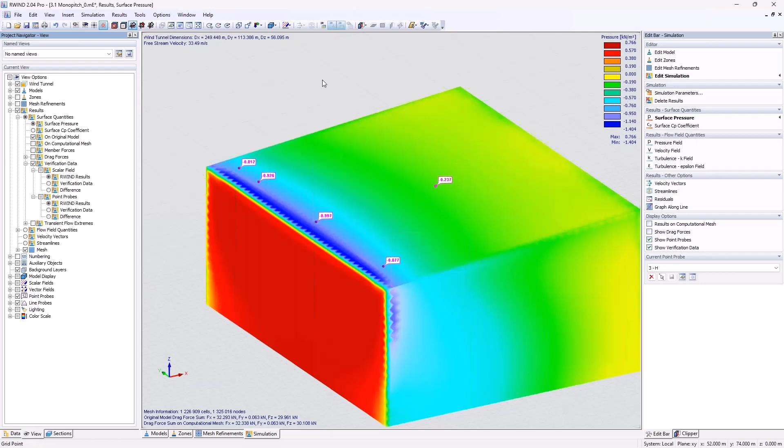And now we can go into the View tab and say, okay, these are our Rwind results. You can see the probes, of course, also show the values our Rwind is giving us. This is the verification data, and now, big drums, we can now also check the difference about it.

Let me quickly restrict our zones only to the roof. You can do that usually in the section tab. And then we can see that the dark blue would most likely be a difference of 0, and the wider away we are, we will have a bigger difference.

But of course, the standard is not really taking into account maybe a finer determination of an area, so we might have some bigger differences to the standard. What I did not do is a long calculation. What I did is use the recommended wind tunnel size, but only a model simplification factor of 2. So this is not the best calculation giving the best results, but some quick results.

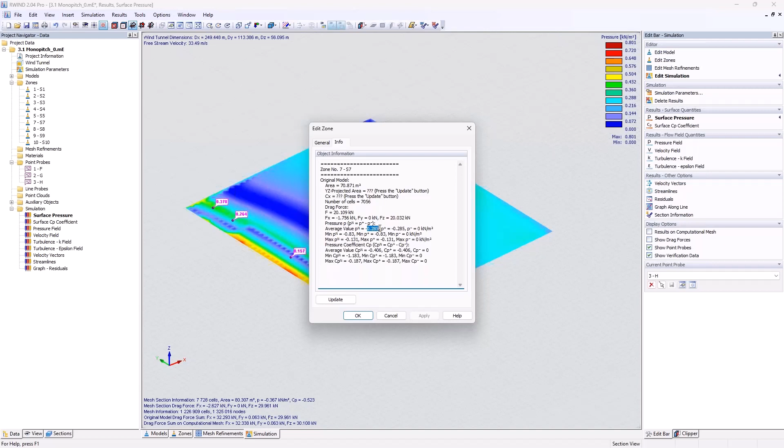And we can see that, well, we are of course away from the standard in certain areas, but you could also try to double click on a zone. So let's, for example, use zone number 7 and get the information about the average values inside the zone, in order to double check them as well and compare them to the standard.

So this is most likely the biggest new feature we introduced for you, in order to compare the stuff with experimental data. What you could also do is enter more probes, define more areas, and think about what verification interpolation you are going to choose.

So I was just about to jump into the point probes, but maybe my computer does not like it. Okay, so I was most likely even done with this. So let's continue with the presentation. I see I'm a bit ahead in time, but I think this is no problem.

So last but not least, the prospect of today. We, of course, try to constantly expand our database of verification examples. If you do not know, you can find them in our download area. There is the verification example area where you can filter for RWIND and RWIND 2. And there we provide already some validation. For example, the latest one, validation and a comparison to a Japanese wind tunnel database, where you can see that also, of course, zones were created and double checked and compared to the standard.

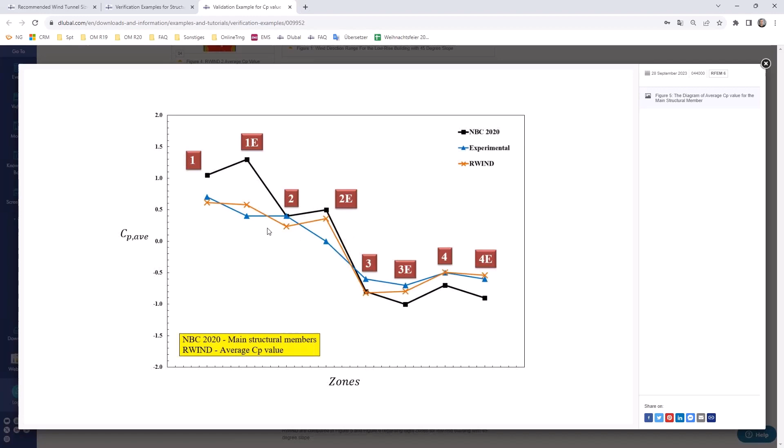Where is the experiment? Where is the standard? And where are we? So it's not about judging what is the correct result, I think, because nobody really knows what assumptions the standard really did in the past, but it's most likely just about to get a feeling: is my CFD model matching with the reality or not? And maybe I can even get lower values, which might be a bit more economical, but still on the safe side. So you can find all the input values, and if you scroll down, there should also be the model to download.

So you can already gather these models. Maybe if you have a similar model, put them into the tunnel with the settings we did, let them run, and then gather the information you may be curious about.

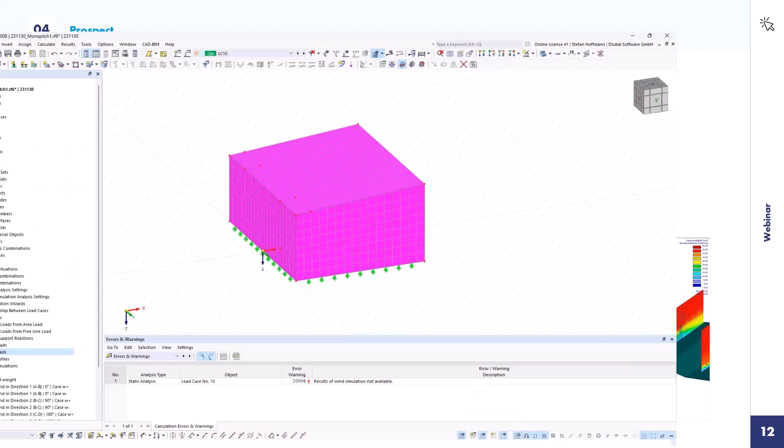What I did not show this time in the webinar is the connection of the results from RWIND to the RFEM GUI. What we are going to introduce more is that you can run RWIND as a solver in the background. There is a tab then in here, if you are in the wind analysis load case, that you can switch to the RWIND results. Currently, I think it's only the pressure and the Cp coefficient being drawn over here in order to be evaluated.

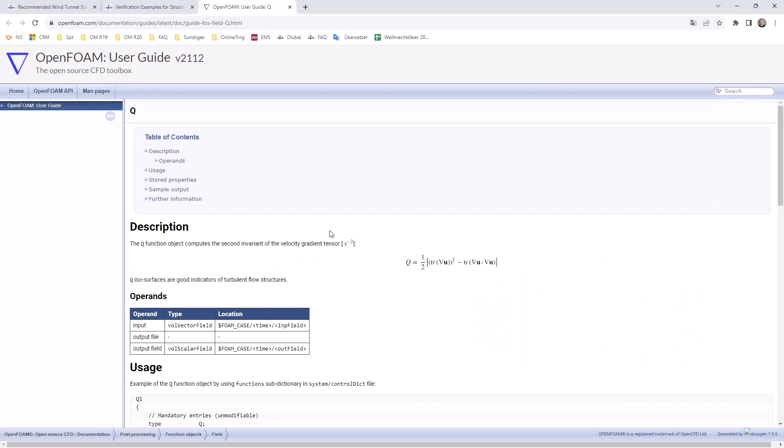We also plan, that's not fixed, the expansion of the result values as Q-ISO surfaces. I never heard about them yet, but I'm not that scientific CFD analyst. You can find in the OpenFOAM user guide information what this vector field is about, and if this is useful for you to evaluate your model, you can check out these results hopefully in an upcoming version.

And last but not least, beside all other features that are planned, we are of course planning to offer more wind tunnel scaling options that can be transferred from the RFEM GUI to the RWIND GUI.

All right, Andreas, so I'm a bit ahead in time, 5 minutes, but maybe you can close the gap and I would hand back over to you. Okay, thank you, Stefan, for this nice presentation about the current state of RWIND. And yeah, we're quite curious if the features are integrated in the program in the next time.